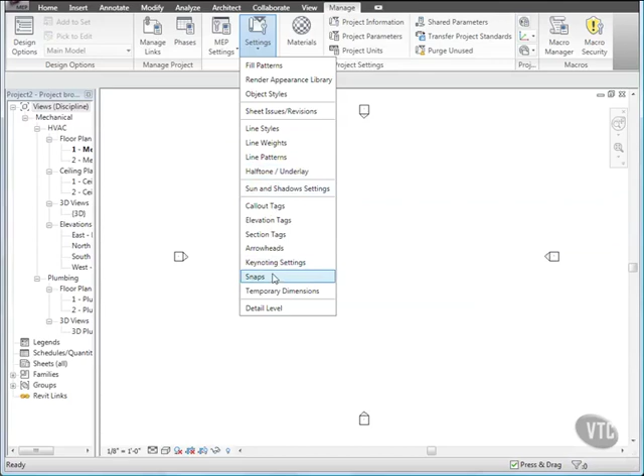Start a new project using the default template. Then click the Manage tab, and from the Project Settings panel, click the Settings drop-down and select Snaps. Notice that you can modify both length and angular snap increments.

As you zoom in and out within a view, Revit MEP uses the largest increment that represents less than 2 millimeters in the drawing area. You can add an increment by entering the value with a semicolon after it. Click inside the Length Dimension Snap Increments box, following the value 4 feet semicolon, and enter 1 space semicolon space.

Under Object Snaps, notice the 2-letter acronyms next to each snap option. You can use these shortcut keys at any time when working on the design. For example, if you want to snap an object to a wall midpoint, you'd enter SM, and only midpoint snaps are recognized until you commit an action. After you click to place the object at the midpoint, snapping reverts to the system default settings. Click OK to close snaps.

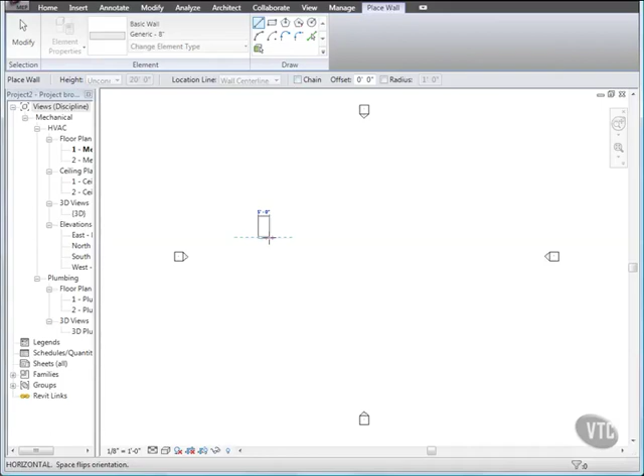Then click the Architect tab, and from the Build panel, click the Wall drop-down and select Wall. On the Options bar, clear Chain, and click in the center of the drawing area and move the cursor to the right. Notice that the listening dimension snaps at 4 feet increments. If it does not, zoom out until it does so.

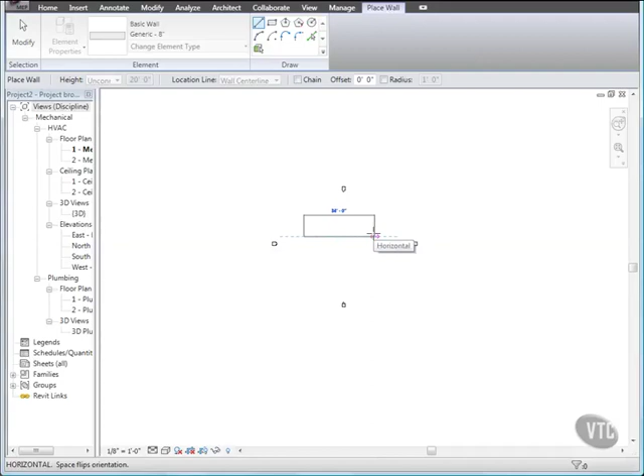A listening dimension refers to the dimension that displays while you are sketching. This dimension reacts to the movement of the cursor and numerical keyboard entries. While still sketching the wall, enter the shortcut key SO to turn snaps off. Notice that when snapping is turned off, the listening dimension reflects the exact length of the wall as you move the cursor left or right.

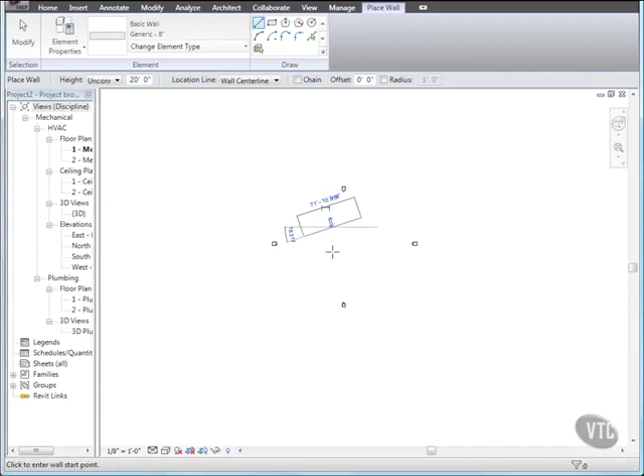Click to set the wall endpoint. Notice now that snapping is once again active. When you use shortcut keys to control snapping, the command is only active for 1 click of the mouse. Notice also that as you move your cursor along the wall, it snaps to various points on the wall, such as the endpoints, the midpoint, and the wall edges.

Enter the 2 shortcut keys SM. This is a snap shortcut key that restricts all snapping to midpoints. Notice now that when you move the cursor along the wall, the cursor now snaps only to the midpoint of the wall. Click Modify,

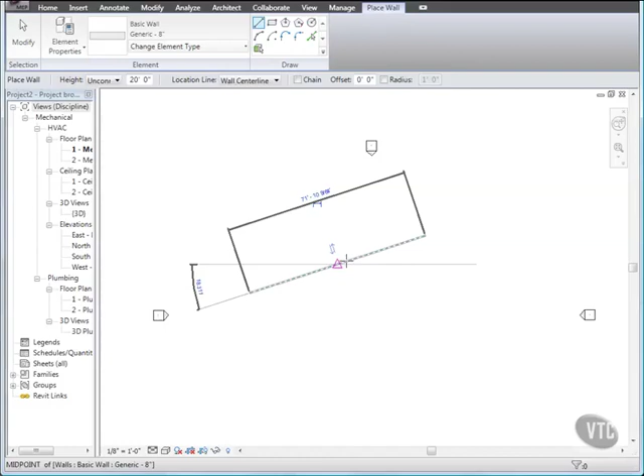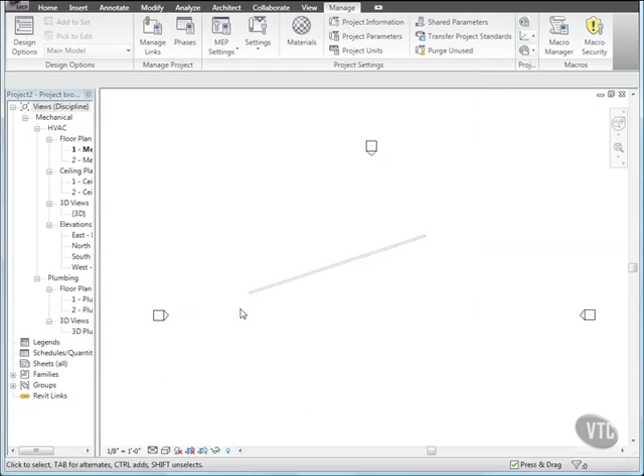and then go back to the Manage tab, and from the Project Settings panel, click the Settings drop-down and select Snaps. In the Snaps dialog, delete the value 1 and the semicolon, and click OK, and close the file without saving it, as that concludes this lesson.